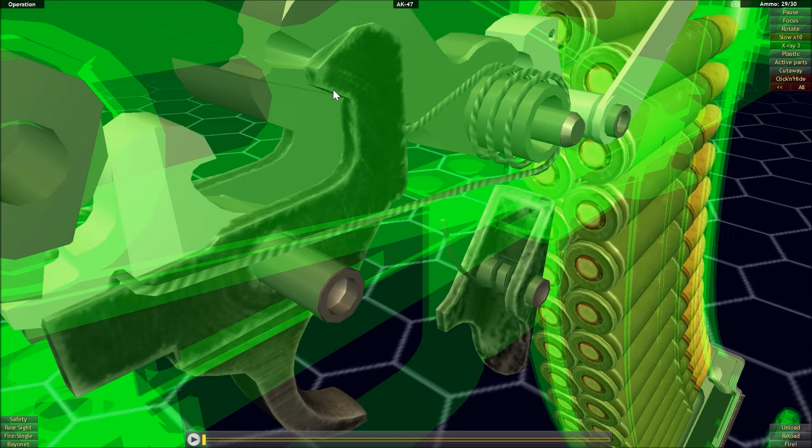And we'll start off by identifying some of the major components that you may be familiar with if you've seen my hammer fired video. So starting off, we have the hammer itself here. We have the trigger with the sear attached. So the sear is in contact with the hammer due to this surface right here. And when we pull the trigger in the semi-automatic mode, that sear is going to pivot down and away from its contact with the hammer, letting it go.

So we're seeing a repeat of the same fundamentals we've seen with other hammer-fired actions. But just like with other hammer-fired actions that are semi-automatic, there has to be some mechanism that's going to hold the hammer in place until the bolt comes back into battery. So as the bolt comes back to the rear, we need some mechanism to hold the hammer in place while the bolt is coming forward and keep it held back until the bolt is fully forward into battery.

And to do this, we have this hook here that is part of the trigger group. This hook ensures that as long as we have the trigger held in the semi-automatic mode, that we cannot drop the hammer again. Once the bolt comes fully forward and comes into battery, if we are to let out the trigger, eventually, due to its attachment with the trigger, this hook will also pivot away, releasing the hammer, but at the moment that it releases the hammer, the sear is in place to catch it and prevents it from coming forward.

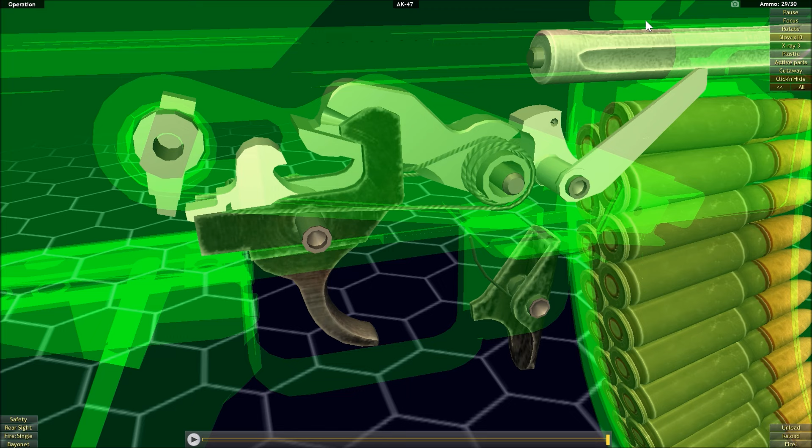Now the trigger is reset, the hammer is held by the sear, so if we were to pull the trigger again, the hammer would fall forward. This is its normal semi-automatic function. And this hook is going to keep that hammer held so that we have that semi-automatic functionality and do not drop the hammer until the bolt is fully forward into battery and the trigger is reset. Now you might be wondering, what is preventing me from letting out the trigger before the bolt is fully in battery?

Well, there's another backup mechanism, and this mechanism is part of how the fully automatic function works as well. And it is this lever here. And if we bring the x-ray out a little bit, we can see that this lever is going to cam as the bolt comes forward. Now, what is important about this is without it camming, this lever will block the hammer from being able to come forward. So it's these two mechanisms.

This mechanism here prevents the hammer from coming forward until the bolt is fully in battery. Once the bolt is fully in battery, like so, this block is no longer in the way of the hammer. And now we can let out the trigger and let it reset for the sear to drop the hammer again when we pull the trigger again.

So how does this differ in the fully automatic mode? Well, obviously we don't want this hook to hold back the hammer until the trigger is reset before we can shoot again. We want the firearm to continue to cycle and fire off more rounds as long as we have the trigger held in. So our selector switch is going to allow us to do that.

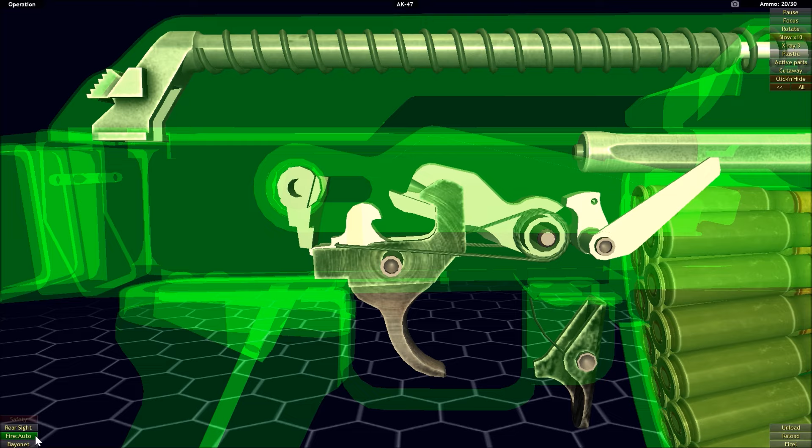And just to show what happens when the lever goes into safe mode, let's go ahead and do that. And here we can see that it pivots further in. So the fully automatic mode is in between semi-automatic mode and safe. If we flip the lever fully into the safe position, the block pivots in and it will block not only the hook, but also the trigger itself.

So if we try and pull the trigger, it will not pivot and the sear will not let go of the hammer. So that is how the selector switch on the AK-47 works. It has the dual functionality of allowing for fully automatic fire as well as putting the firearm into safe.

The next couple examples we're going to take a look at are variants of the AR-15 platform. The first of which is the M16A1, which only has semi-automatic and fully automatic firing modes. We're going to start off by taking a look at the semi-automatic mode so we can see how that functions and how it compares to the fully automatic mode. The selector switch is right here, and currently it is in the semi-automatic mode.

So as we pull the trigger, it is going to pivot, and the sear, which is here, is going to break its contact with the hammer here. Once that happens, the hammer is going to fall forward. And as the bolt pushes the hammer back, it's going to contact this hook, very reminiscent of how the AK-47 works. The hook is going to hold the hammer back

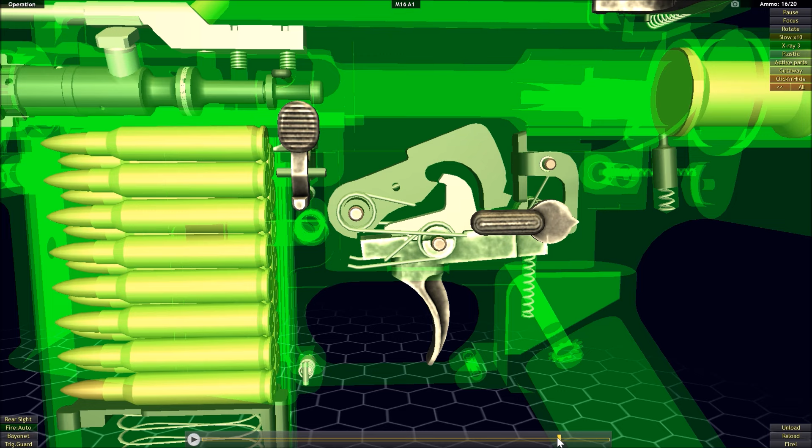And we'll see that happen as that part of the bolt that kept this piece forward comes into contact with it. It's going to push it forward again, breaking its contact with the hammer, at which point the hammer can then drop forward again. But in this instance, we haven't held the trigger in, so the trigger is going to reset, and the sear is going to stop the hammer from being able to move forward.

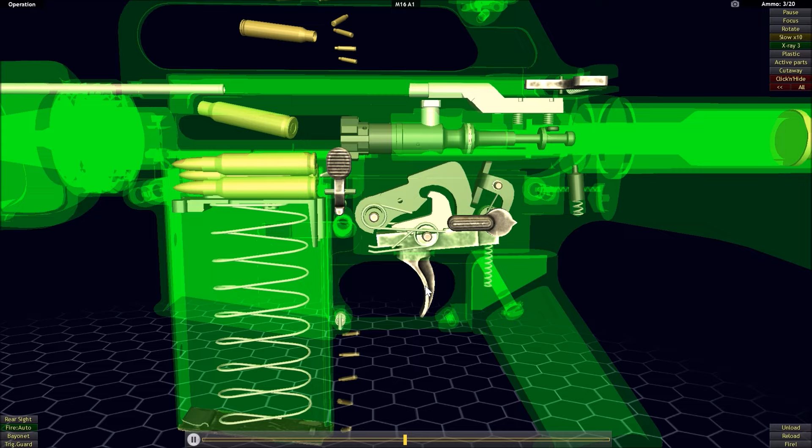But if we were to hold the trigger in, we can see that interaction. Every time the bolt comes fully forward, it's going to push forward on that locking piece, allowing the hammer to drop forward again. And it's not until we let the trigger out that the sear will grab a hold of the hammer and prevent it from continuing to come forward. So that's more or less how the select fire function works on the M16A1.

So with the selector switch set onto semi-automatic mode, I think I have a little bit of an issue because I need to reload. And we'll speed that up. There we go.

All right, now with the bolt forward, if we were to switch the selector switch over, we'd block this piece, preventing it from moving. And when we pull the trigger, this piece will no longer move because it's being held by the selector switch. Let's slow that down so you can see it a little bit better. And now it's going to be the hook that acts upon the hammer instead.

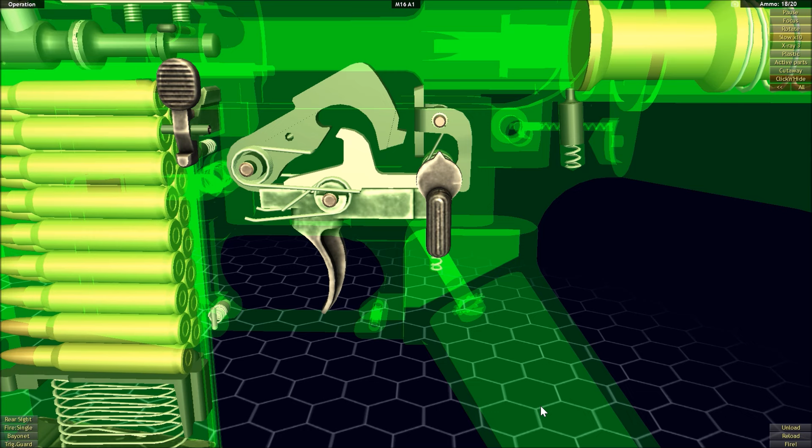The last example we're going to take a look at is the M4 carbine, which is going to function similarly to that of the M16A1, but one extra bit of functionality is going to change up its function quite a bit, and that is the addition of a burst fire mode. So just like with the M16A1, we have the trigger here, the sear with its contact with the hammer, and I would say a hook, but in this case, there's actually two hooks, and this is to facilitate the burst fire mode.

So with the selector switch in the semi-automatic mode, currently the selector switch is holding in the innermost or rightmost hook, preventing it from moving, but the leftmost or outermost hook, as we're looking from this side, will move during the cycling of the action. So as we pull the trigger, we'll see that outermost hook pivot forward, and it will interact with the hammer just like what we saw with the M16.

And it's not until we let the trigger back out and it resets and the sear grabs a hold of the hammer that another trigger pull will allow the hammer to drop forward again. So very similar there. But we do have this extra hook here, and we also have the locking piece like before. Now, the fully automatic mode works pretty much exactly the same as what we've seen before. So let's go ahead and take a look at that first.

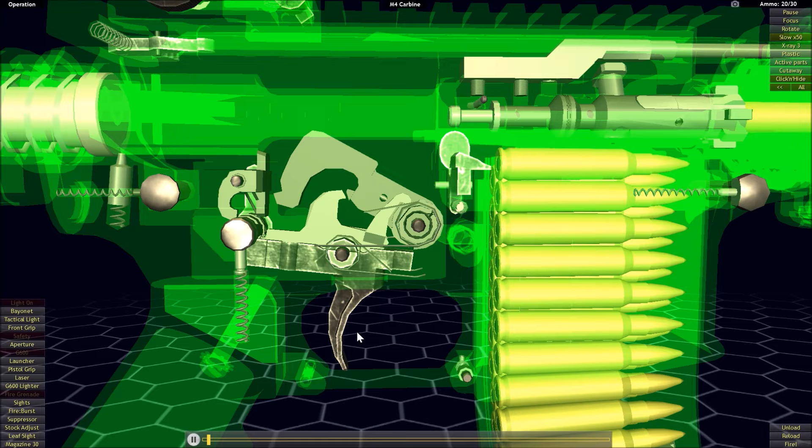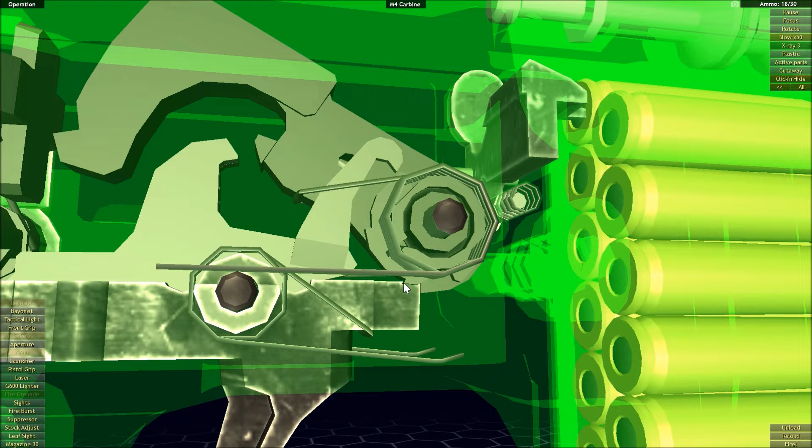What you might have noticed there with the last shot, that hook came forward and grabbed the hammer. It didn't do it with any of the other shots, so if we watch that again, we'll note hook's not coming forward, hook's not coming forward, but with the last shot, the hook comes forward. And this occurs because of this cog. And you'll note that the cuts in the cog are actually unevenly distributed. So you have shallow cut, deep cut.

So if you pay attention to the hook and how it sinks into those cuts, first shot, we have the shallow cut. Second shot, shallow cut. Third shot, it falls into the deep cut, and then the hook comes in. So more or less what happens is as the hammer comes forward, this spring is going to release its tension, driving the hammer forward. And when it releases that tension, it's going to stop squeezing this inner ring here. And we can see inside that is a spring of its own.

So what happens is the cog will freewheel when the spring on the outside of it lets it go. And when it freewheels, it will not travel with the hammer. But as the hammer starts to come back down, this spring is going to squeeze it again, and then the two will move together. So let's watch that interaction, but also as it occurs, watch what the hook does to the cog as well. So pay close attention to the cog and zone out pretty much everything else.

So here, as the hammer comes forward and the cog is freewheeling, the hook is literally pulling down on the cog and making it so that it ratchets around to the next notch. So if we watch that one more time, you'll see once the cog starts to freewheel, it's going to try and go with the hammer, but the hook is going to prevent it.

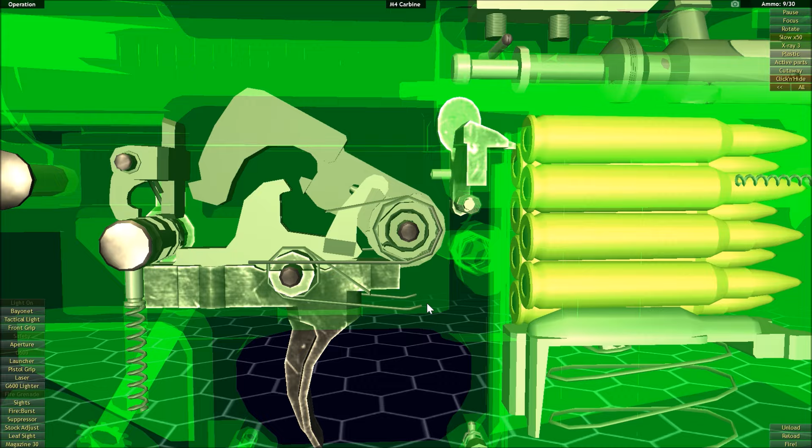This spins the cog around, allowing the hook to continue to go along the cog, ratcheting along until we get into that deep cut. Then the hook's going to come in, grab the hammer. So this is how it does the 3 shots and then stops. So it's pretty complex in the way it functions, and I hope I explained it well enough for you to understand it. And I really do apologize that I can't slowly go through the motions, but that is more or less how it works. It's just a ratcheting action.

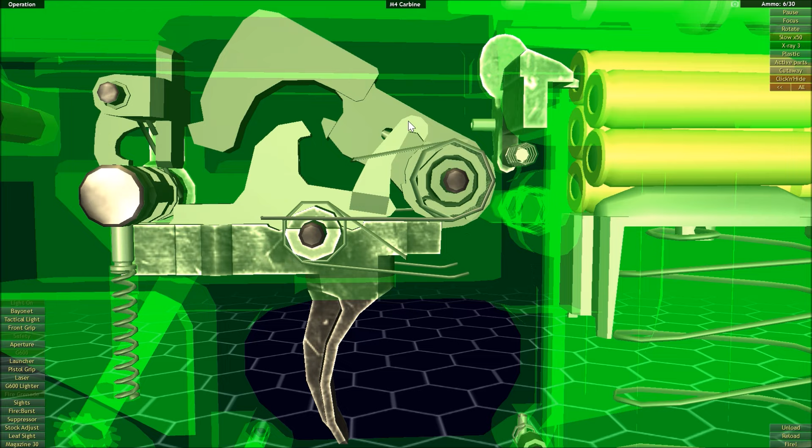As the spring here releases its tension, it allows the cog to freewheel, the hook prevents it from moving and more or less pulls it down so that when the hammer comes back and the spring squeezes the cog again, the hammer and the cog will move together. So as the hammer is coming back, it's going to ratchet that cog along to the next cut, and it continues to do so until that hook finally falls into the deep cut, which is going to cause the hook to grab the hammer. In any case, that's going to wrap up my look at the select fire functionality in Firearms.